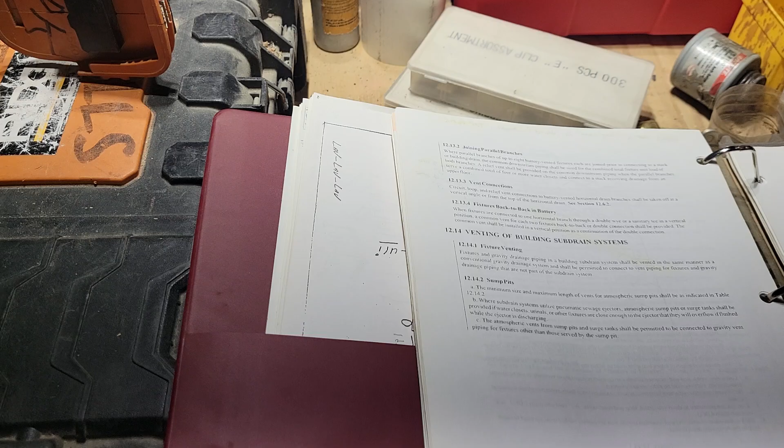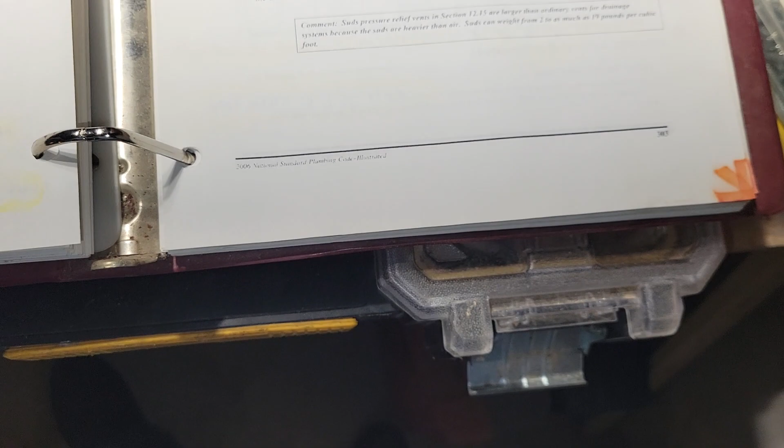All right, so I didn't read the instructions on the pump yet, but just to show you some of the things I was speaking of, it's 11.7, I believe, in the code.

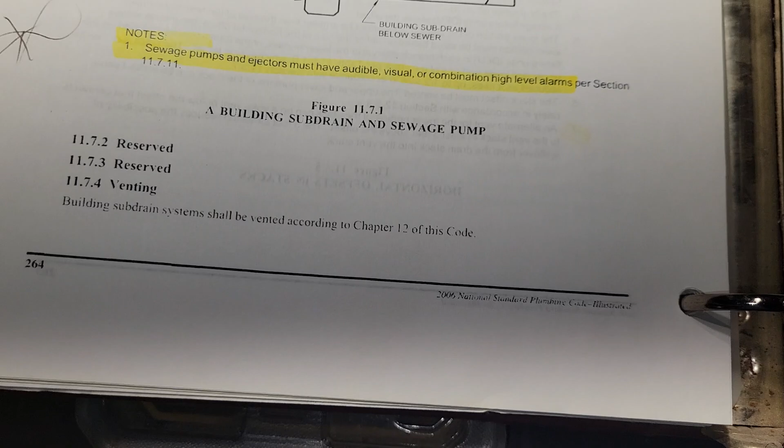This is 12.14. I think it's 11.7. Look at that, and they say the mind is the first thing to go. How the hell do I remember that? 7-Eleven. Now, reading the code, 7-Eleven store backwards is 11.7. That's how I remember the code for ejectors.

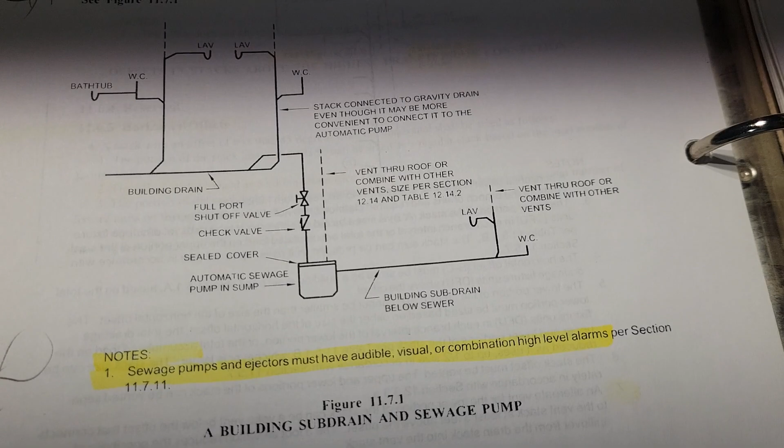So there you go, sealed cover. There's your check valve, there's your full port shut-off valve, check valve, seal cover. It tells you here that the vents can go through the roof or combine with other vents. Now, this is true for a gravity system.

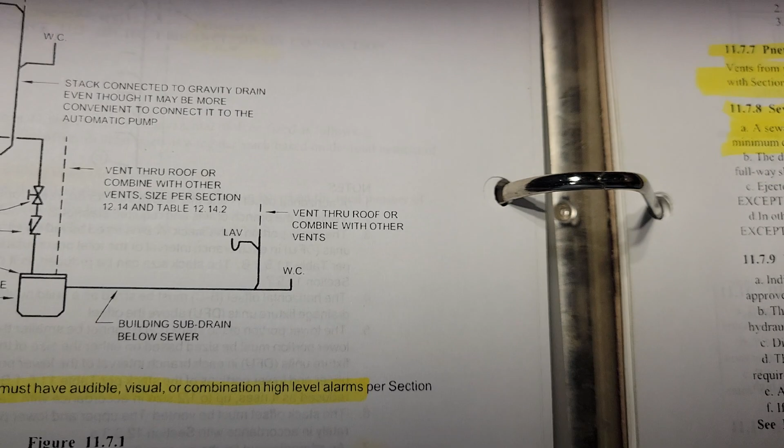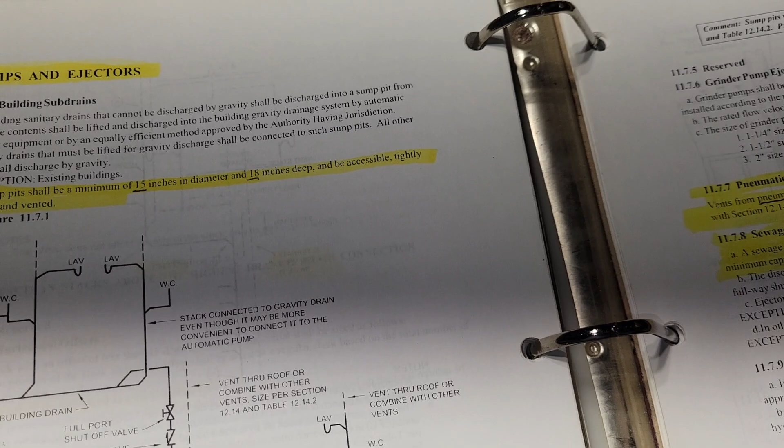So what happened, let me show you what happened. Now, again, this is an older code book, but it hasn't changed really in practice. Those three little words: Authority Having Jurisdiction.

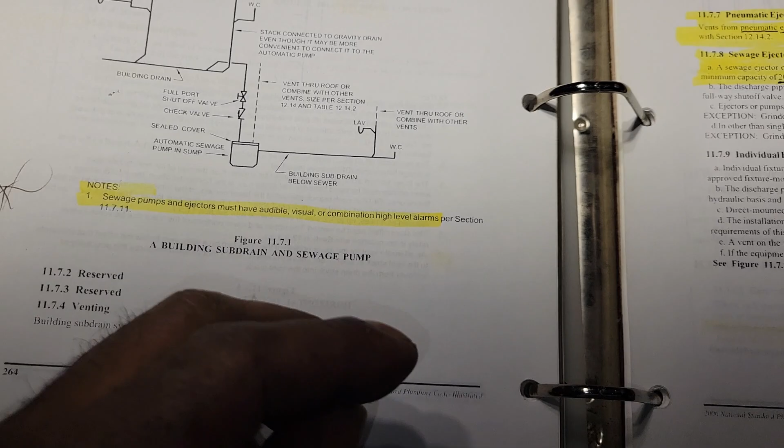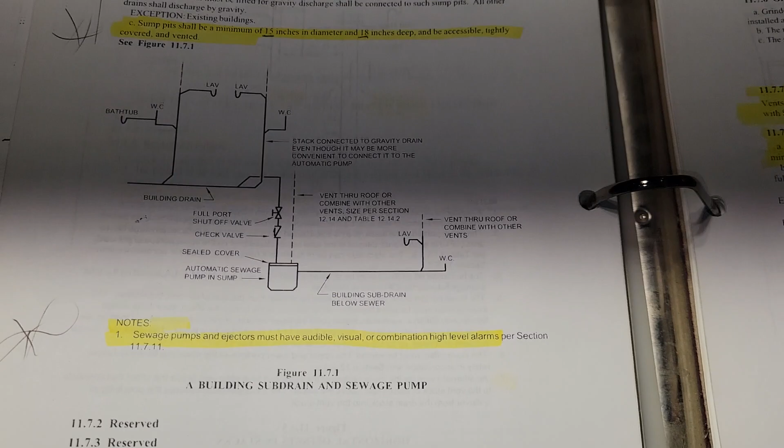So you'll see things in code, and they're starting to phase it out. I think I did a video on that, where they're phasing out local administrative authority as we move towards international. You might still see it. Here it is again. There it is, authority having jurisdiction, local administrative authority.

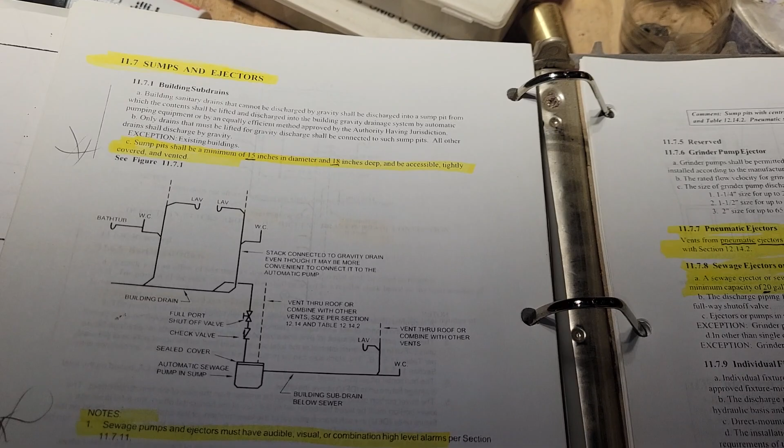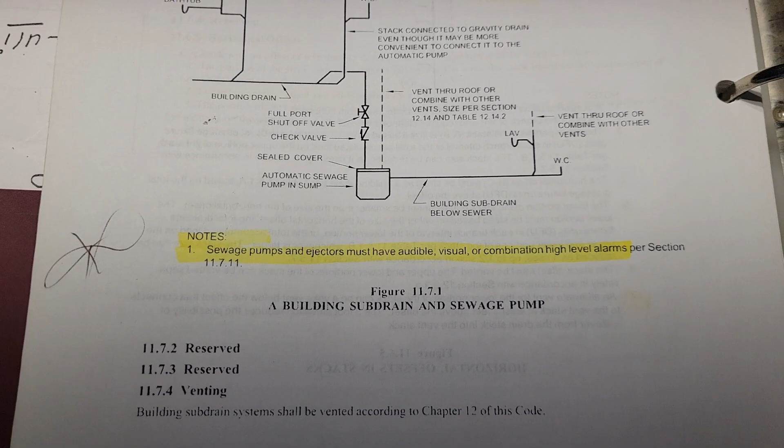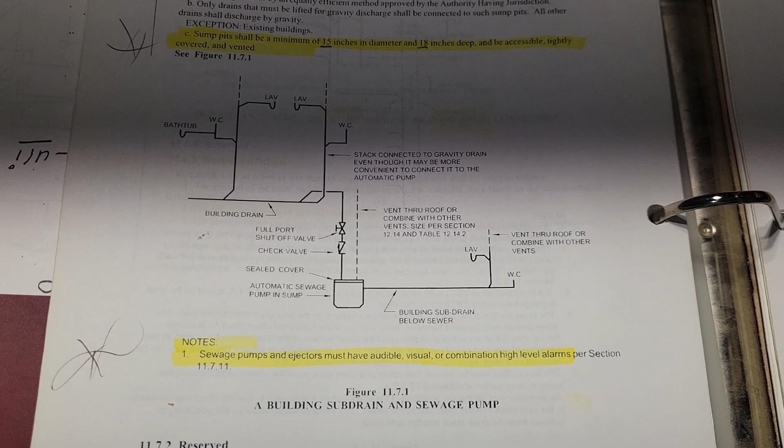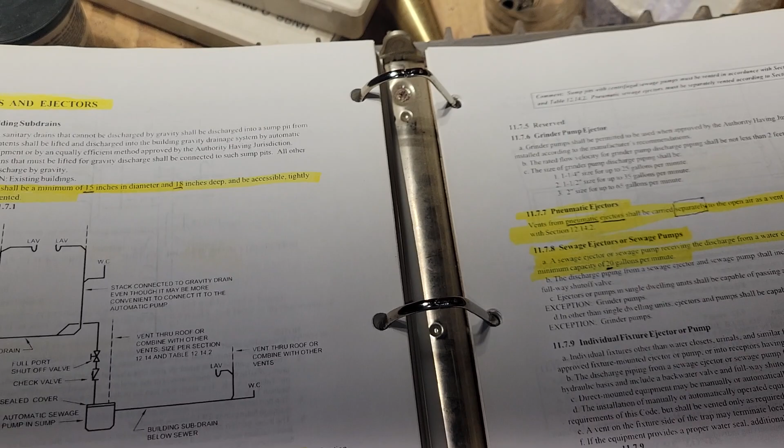So that means it's in the code, but you can get a township where they say, well, we don't want you to tie the vent for the sump pump, a sewage ejector, or this one's called a sewer pump ejector, into the vent in the building. And I've seen guys make the big mistake of getting in an argument with the inspector, saying, well, the code says we can do it. But when it gets down to that particular township where we're at, the last time I checked it was 234 municipalities in the garden state. So imagine, that's 234 places that could more or less make up their own rules.

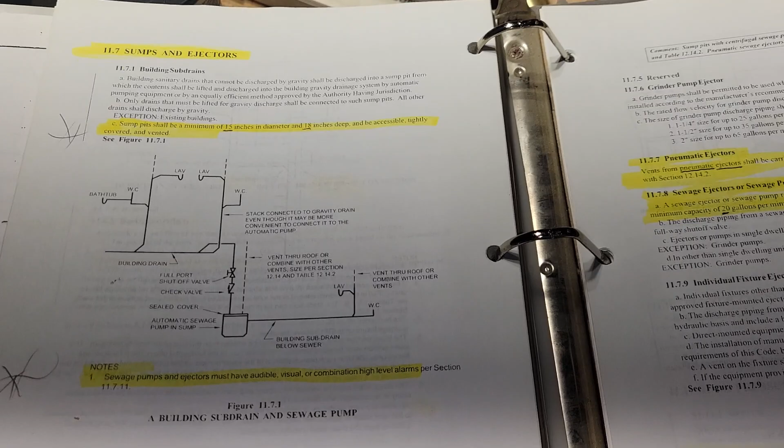So, sewage ejector, sewage pump. I'm just looking at different words here, but I wanted to show you this.

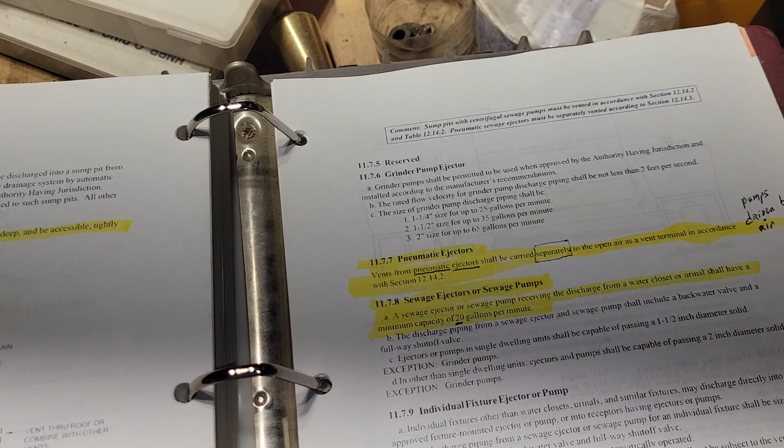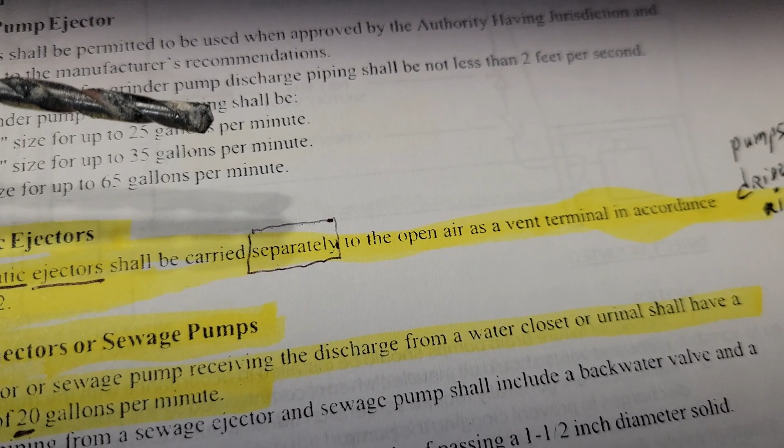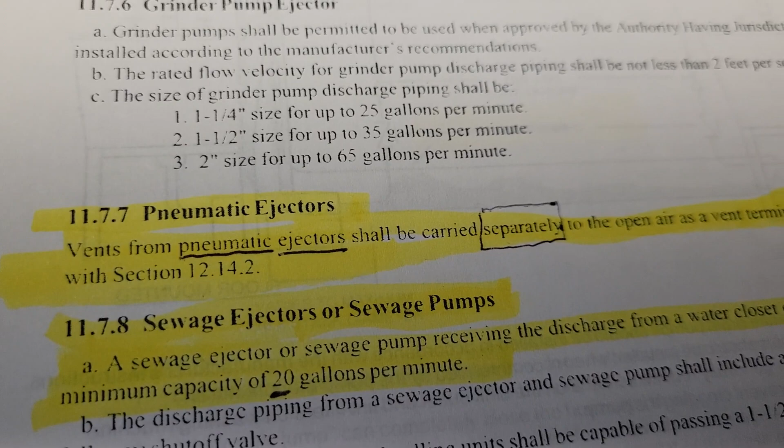Now, here's what happened. Here it is, 11.7.7, pneumatic ejectors. Vents from pneumatic ejectors shall be carried separately, there's the word, to open air as a vent terminal in accordance with section 12.14.2. All right, so it tells you here about gallons per minute minimum, that's the ability of the ejector to move sewage.

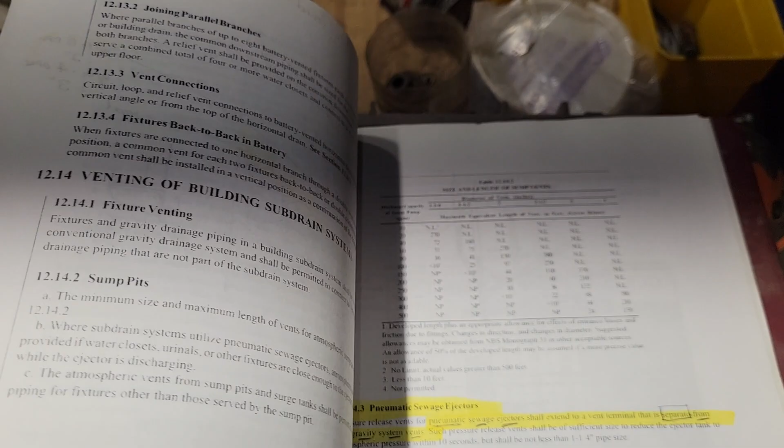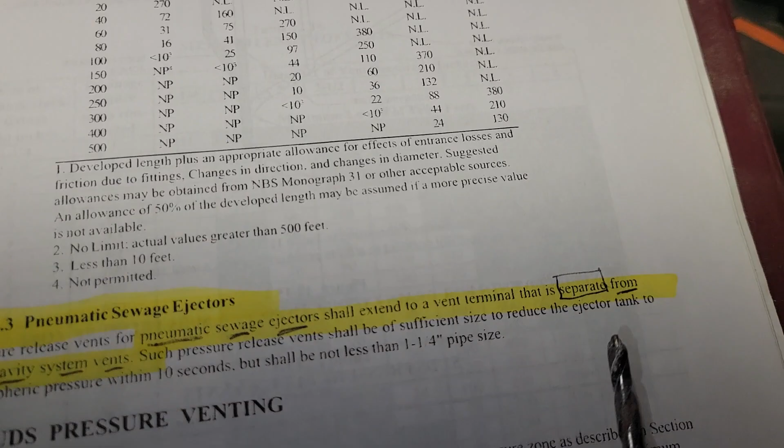So if you go to 12.14, I'm betting they'll tell you about pressure and atmospheric pressure. Let's see, pressure release vent, pneumatic sewage ejector. Okay, so the vent is separate, there it is, from any gravity system vents. So that means you have to go to the roof. Don't pass go, don't collect $200.

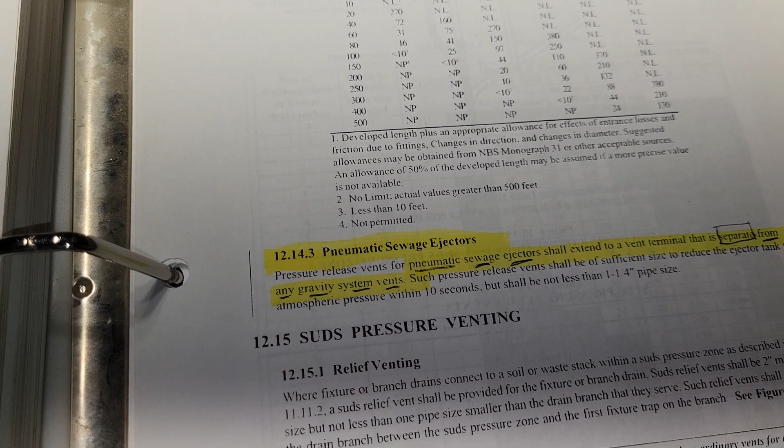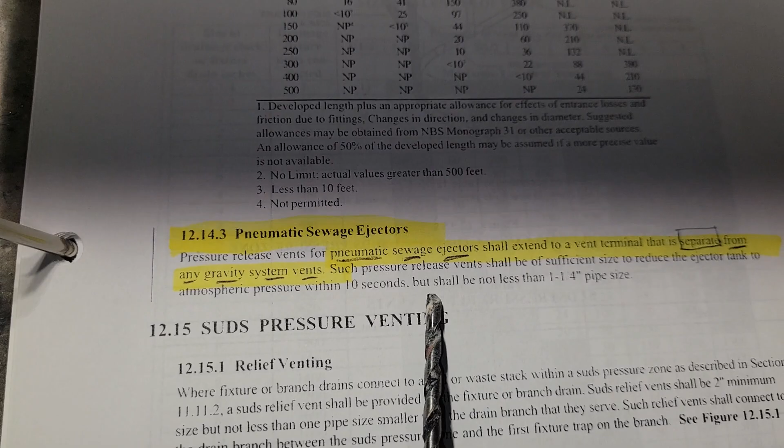All the way to the roof. And it says such pressure release vents will be of sufficient size to reduce the ejector tank to atmosphere in 10 seconds, but shall not be less than 1.25 inches in pipe size. So there's another surprise for you.

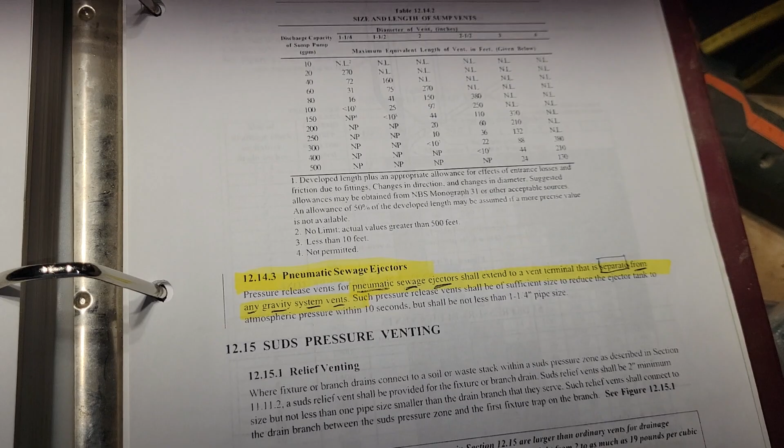You could actually run a 1.25 inch vent off of these. I always use 2 inch. Depends on the chart and the length, you get that off 12.14 here, off the chart. Tells you how far you can go.

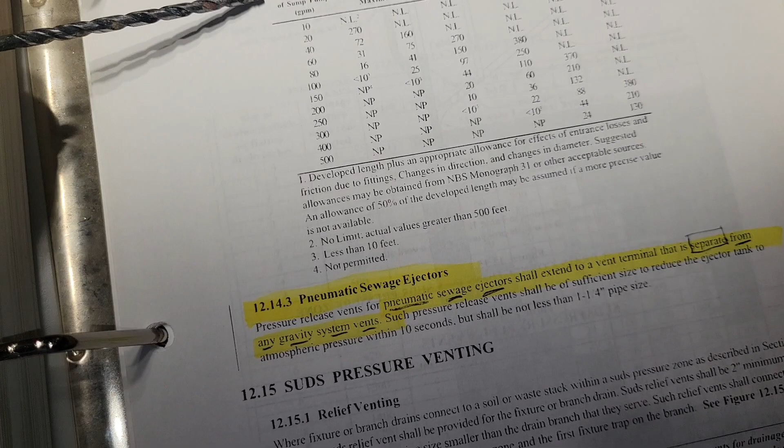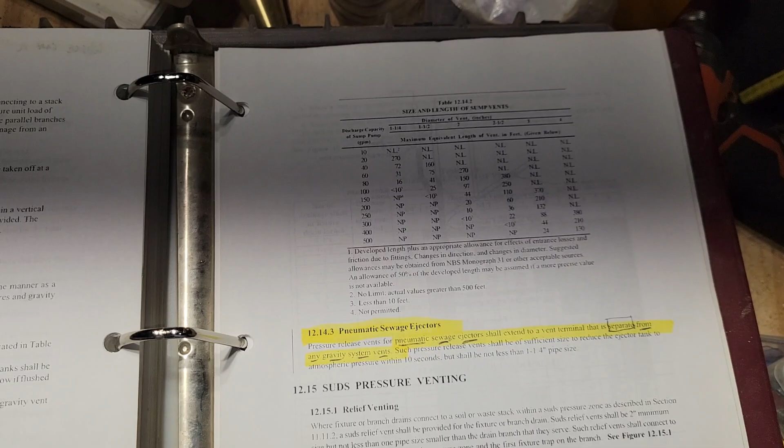With the size and all that good stuff. So here's a pump at 60 GPM, and with a 2-inch vent, you can go 270 feet. Now, what house has 270 feet from the ground? Well, a multi-level building would be a big building, though, 270 feet at 10 feet per floor, that's 27 floors. But I just wanted to show you the fact of the separate vent requirement.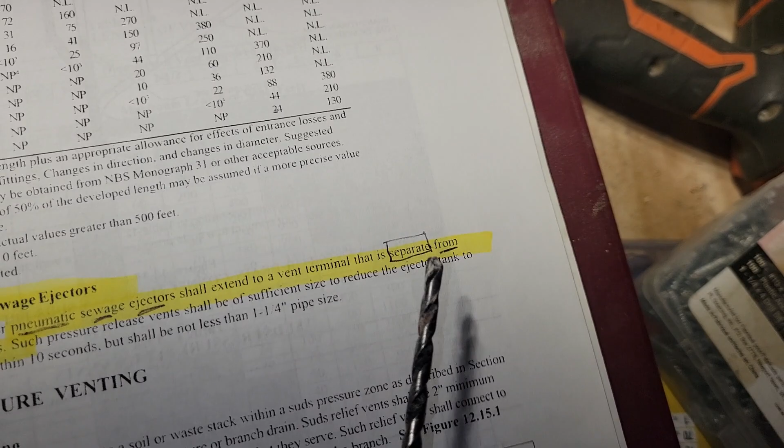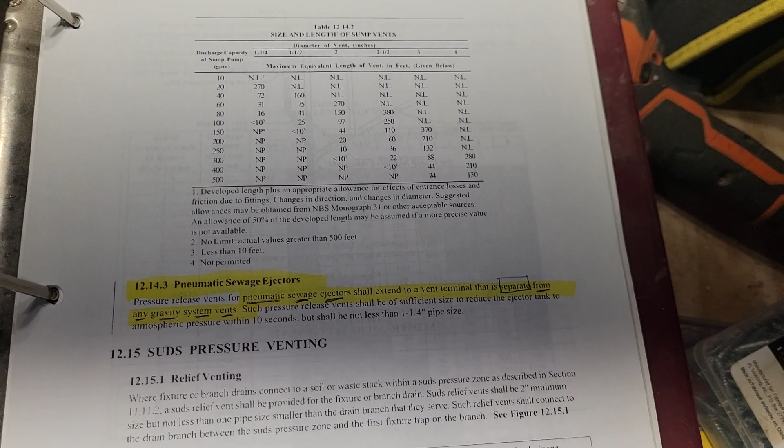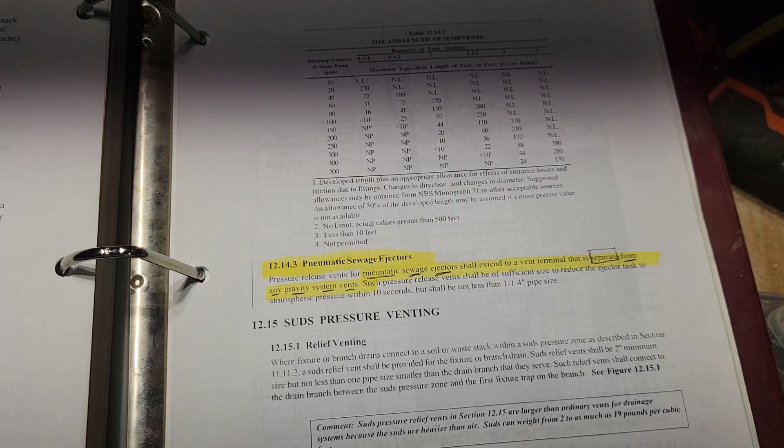So what happened is someone put a pneumatic ejector in, so I hear the story goes, but you guys or gals, put in the comments what you've had dealt with or heard in your jurisdiction or state. They put a pneumatic sewage ejector in and tied it into the existing building's venting. Of course, it wasn't a master plumber, because they would have read it in the code. Most likely it was some yahoo.

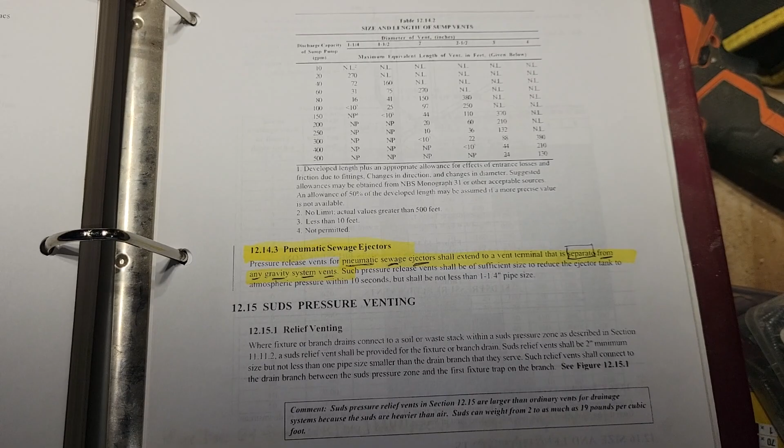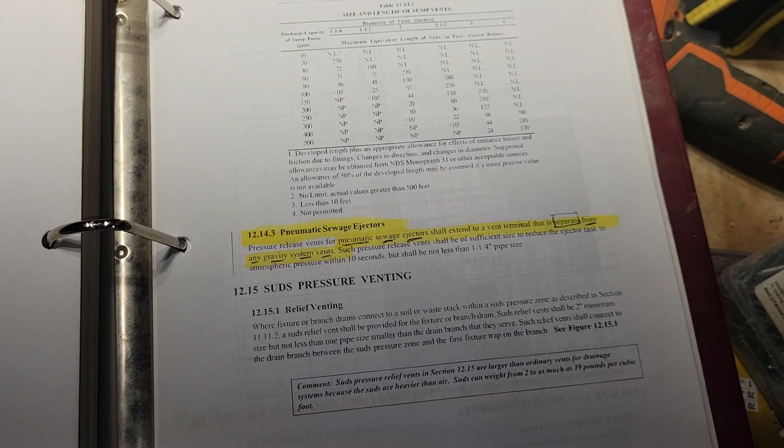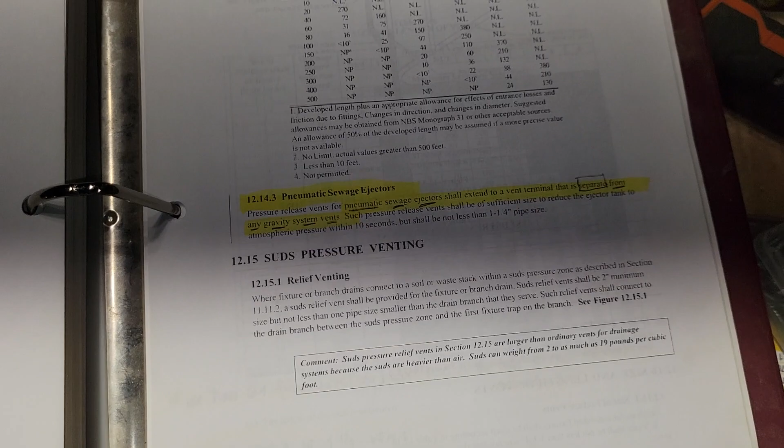And when that thing went off, it either blew the vent or it actually blew trap seals. I've seen that happen with pneumatics if you don't vent them to the roof by themselves. And then the person doing the work gets paid and leaves, and then the homeowner starts smelling sewage, or they'll say, wow, in a certain part of my house I smell sewage all the time.

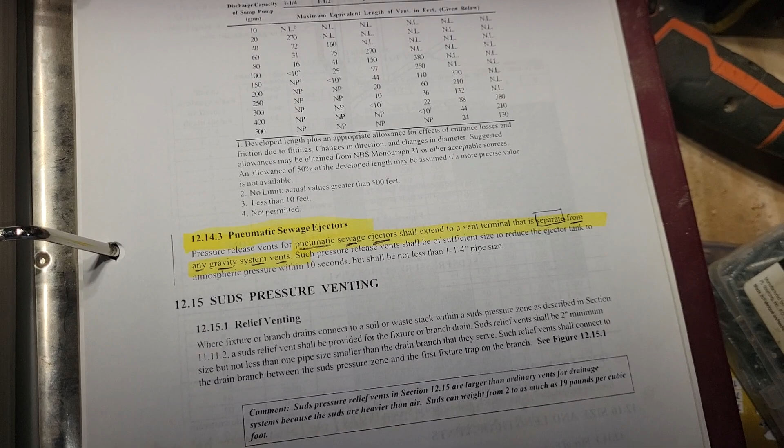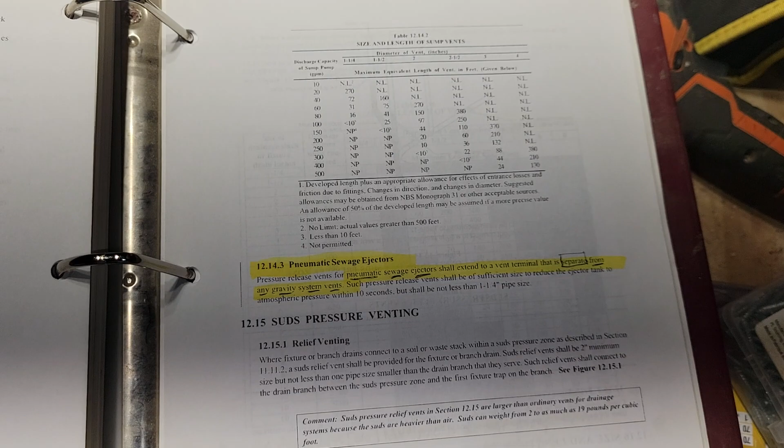And I've corrected a lot of these where you go in and it's like, yeah, somebody didn't vent it right. So a lot of municipalities in the garden state where I'm at said, okay, to hell with it, if you put in a sewer ejector, you better run that vent to the roof and don't touch what's already in. That was their way of resolving the issue, like using a sledgehammer for a fly.

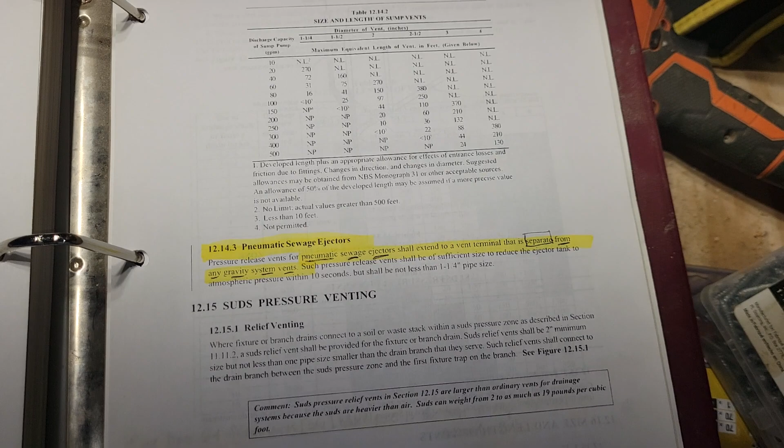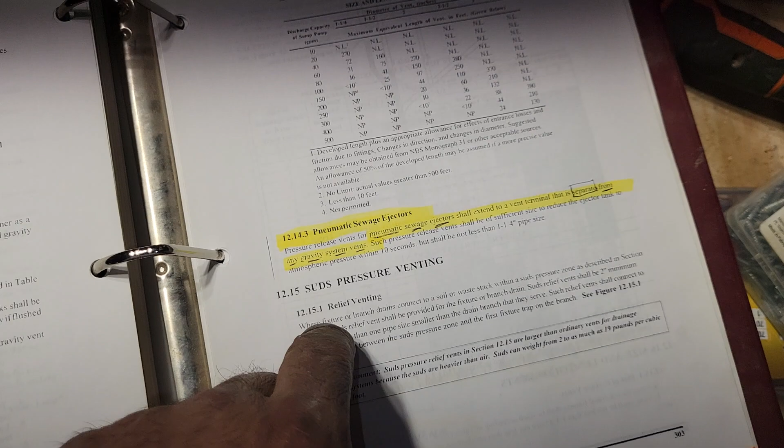So if anybody put a sewer ejector in, it got vented to the roof by itself, and away went the problem, because if it was separated, you wouldn't blow trap seals. However, if you go back to the code, which is what I always try to do, it specifically tells you it's for pneumatic ejectors. All right, this is the sewage ejector series. See you on the next one.